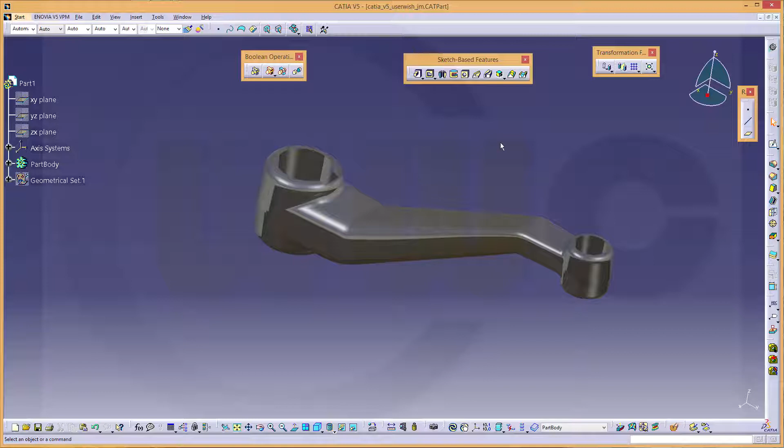I want to do this user wish, and I modeled this after a blueprint he sent me via Facebook. Let's take a look. This picture looked like this, so hopefully I got it right, because I think there is a plane and there is a draft with 4 degrees, I suppose.

Okay, let's take a look at the picture. I think I will do this in 3 bodies. One body will be this, one body will be that one, and one body for this. And I will need some reference elements, so I might need a plane maybe right here with a distance of 205, and I can use an axis system plane right here, and then there should be another plane with a distance of 60 from there to here.

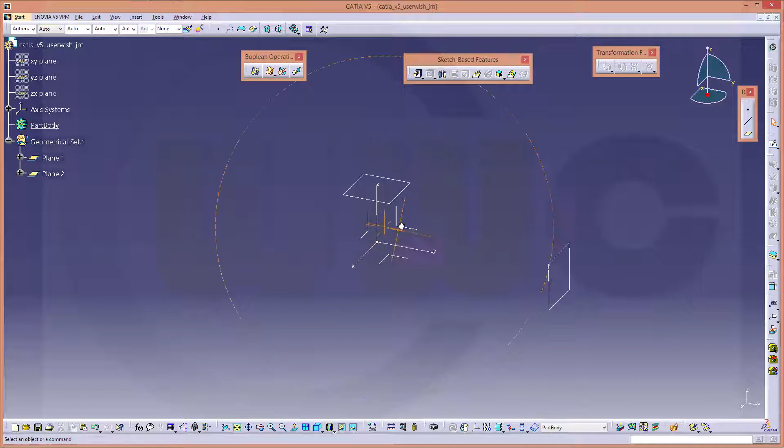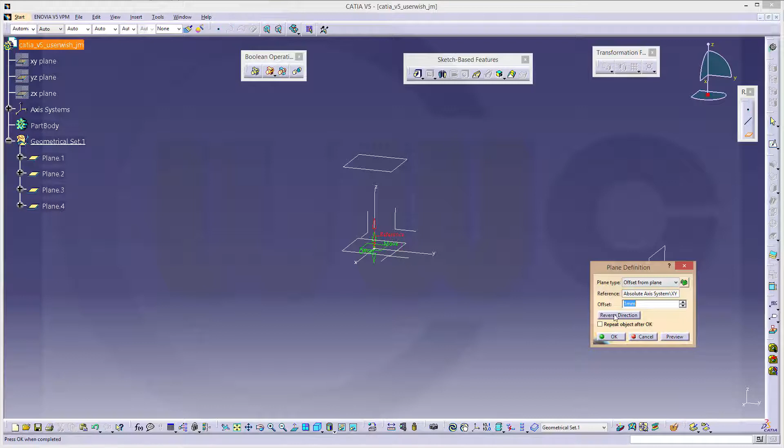And for the drafts I will need some offset planes as well, so let's do these 2. One from that one, distance 1 millimeter, another one in the other direction, and another one up 1 millimeter, yes, and one down 1 millimeter from that one. Reverse direction, and okay.

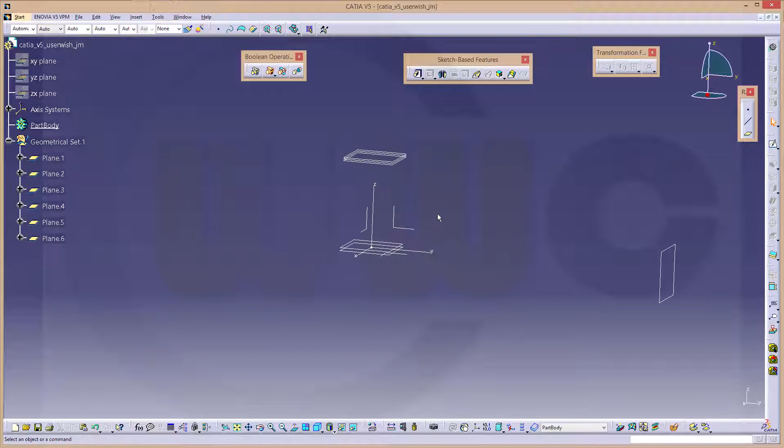Let's check our picture. I need those draft planes for the drafts right here, because this is 2 millimeter. I need one with a distance of 1 millimeter to that plane right here and to that one over there. Okay, so maybe I start with these 2 bodies and add this afterwards. So these are simple extrusions.

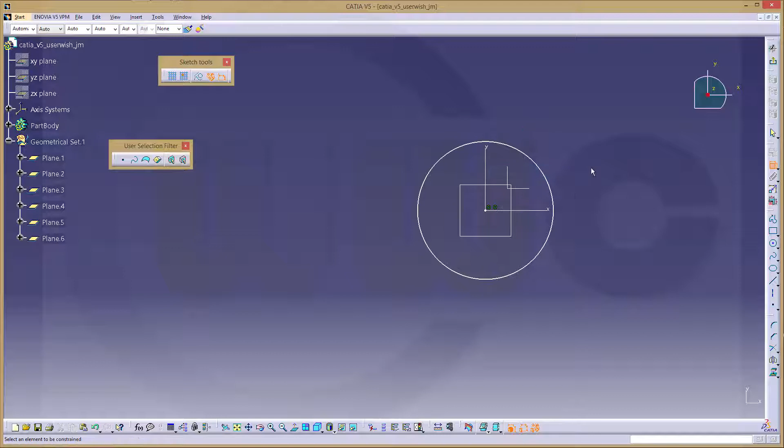So I go for a sketch on that plane. Hide as usual the yellow projected elements, and I need a circle. And this should be coincident on that and on this one. Maybe I should have done it not with planes but with reference points, but it's okay anyway. And the diameter would be 50.

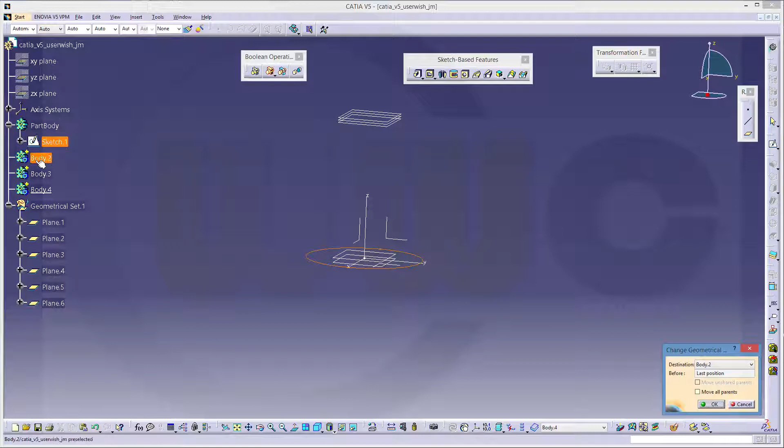Okay, now let's make an extrude, but usually you should leave the part body empty, so we'll insert another body, another one, and another one, because I need 3. Now the sketch is right here, but you could move the sketch over here. Just go to sketch object and change geometrical set and put it into body 2, and okay, make this the body which is in work.

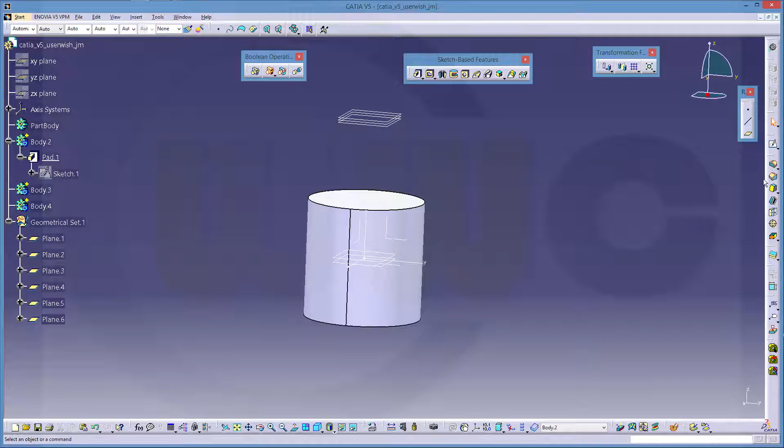Now make an extrude, make it symmetric with mirrored extent, and the distance might be 25. Okay. Now I could already add the drafts. So go for a draft. And 4 degrees, the face to draft is this one. And the neutral element would be the one which is 1 millimeter above, this one. And this would be not only the neutral element, but also the parting element, because I want the draft to stop right here. 4 degrees, the direction is okay, confirm. Or you could do a preview, but this preview isn't always correct, so okay.

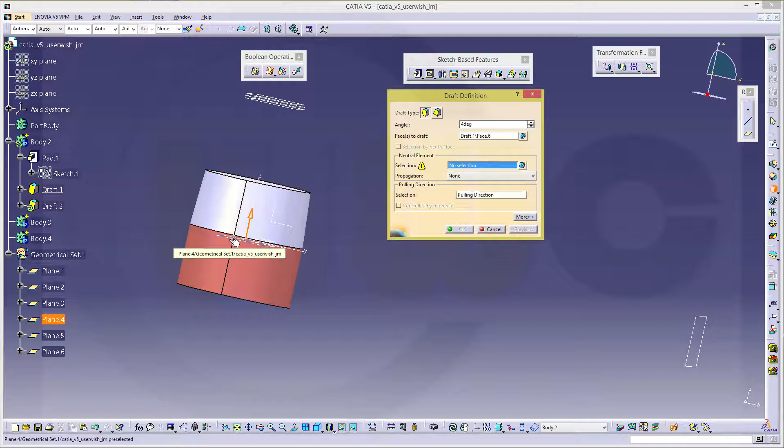And another draft, this face now, and the neutral element would be the one below, direction the other direction, turn it around, and again parting would be the neutral element, and confirm. See, I need almost the same over here, just on a different plane. Define in work object. You could change it right here as well. See, body 4, body 3.

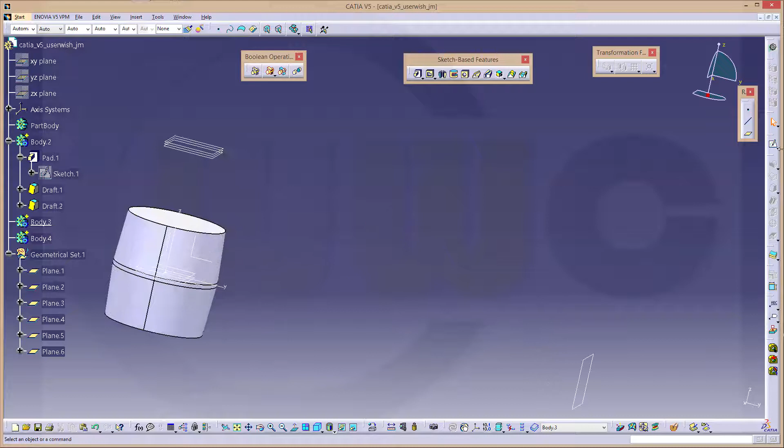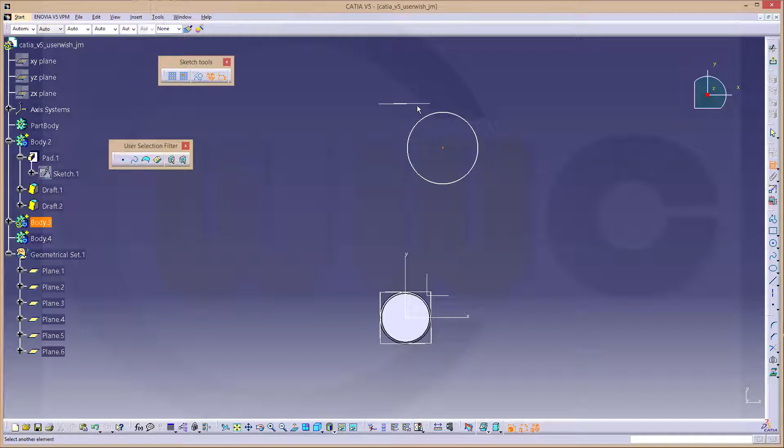And I need a sketch on that plane, on this one. Hide these elements as usual. Okay, and I need a circle, and the center should be on that plane, and it should be on that axis as well. Diameter should be, let me check, 30, and the distance is already there. Okay, leave the sketch, make an extrude, make it mirrored as before, and the distance right now would be 15 to both sides.

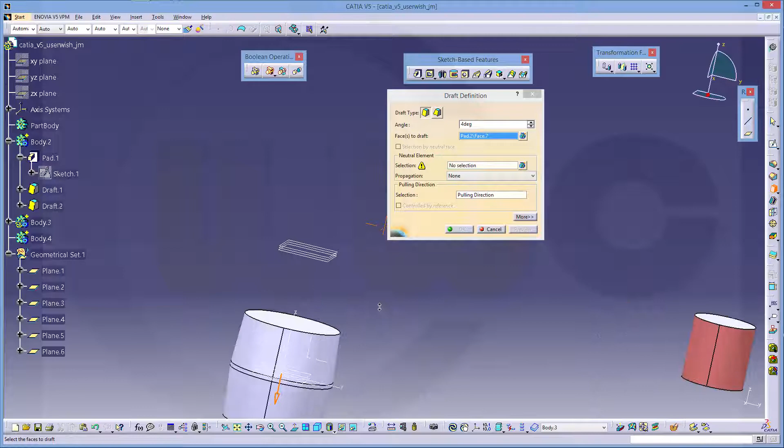Now again the drafts. First draft this side, and the neutral element would be this plane. Direction is okay, parting is neutral. Okay, and another draft, this face, neutral element would be the one down here.

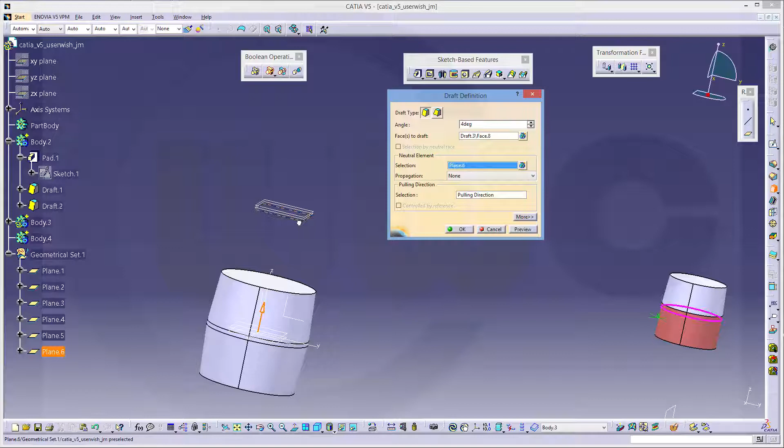Pulling direction the other way around, and again parting is neutral, and confirm. So I got my first two bodies. Now let's go for body 4.

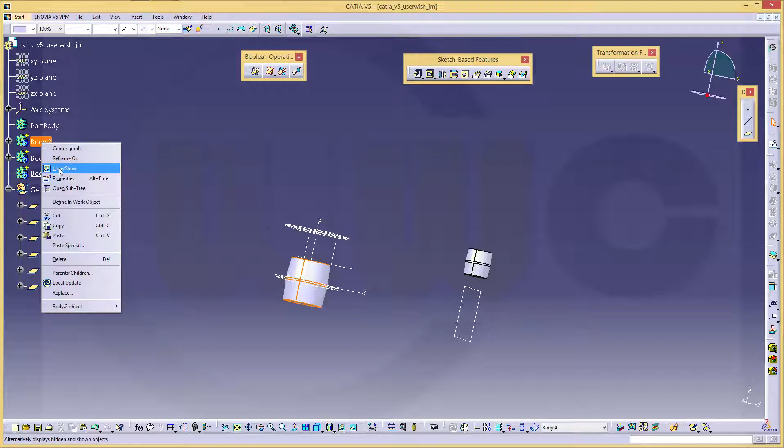Now I could hide these two. Okay, and I could hide at least the 4 planes, I think, these, and that would be this, so yeah. Okay, another sketch right there. Hide the yellow projected elements, and this would be something like, don't snap on anything, like this.

Okay, so that would have a distance to that one, but that's already defined by the plane, so this should be coincident to that one. This should be coincident to this axis, and that point should be right there, and this point should be right there,

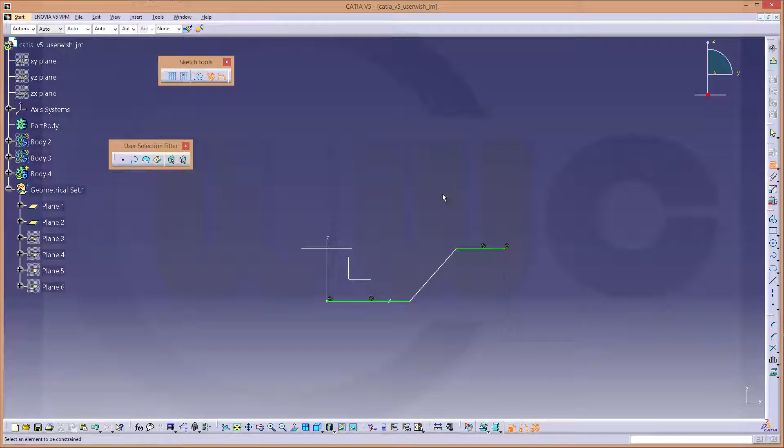and that would be 46.7, and this would be 42.4. Just take a look to our sketch, the image, 42.4, 46.7. Yeah. Okay, back to our Catia.

And I need this one for my offset surfaces, which I need for the drafts on the middle part. Right now in this sketch I don't need these elements, so I will set them, or I could make an output feature, whatever. I will make them for construction only. Okay.

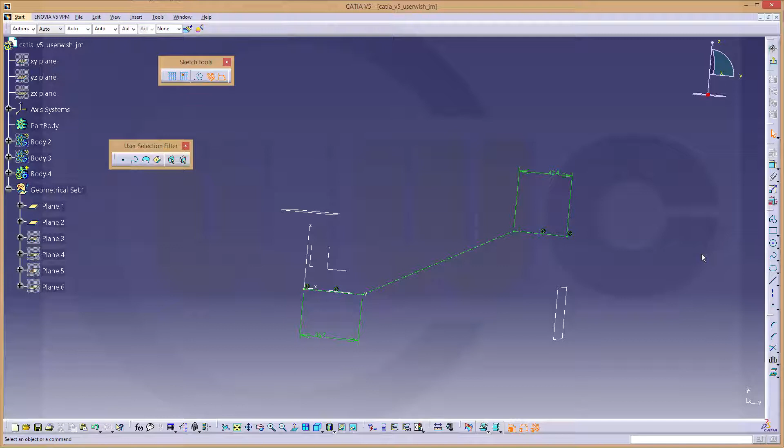Then I could offset these, for example. Oh, yeah, would be an idea. Or I could draw them again, but let's take the offset. Let's look for the offset. I usually don't take it, but it should be somewhere here. Yes. I want to offset this one, and the distance would be in that direction 25. Oh yeah, it's no good because there are different offsets.

So I go for this tool. Let's look normal to the plane, and just press Shift. This should look something like this. Okay. Now those two lines should be symmetric to this one. These two should be symmetric to that one. So move it up a little bit. Here.

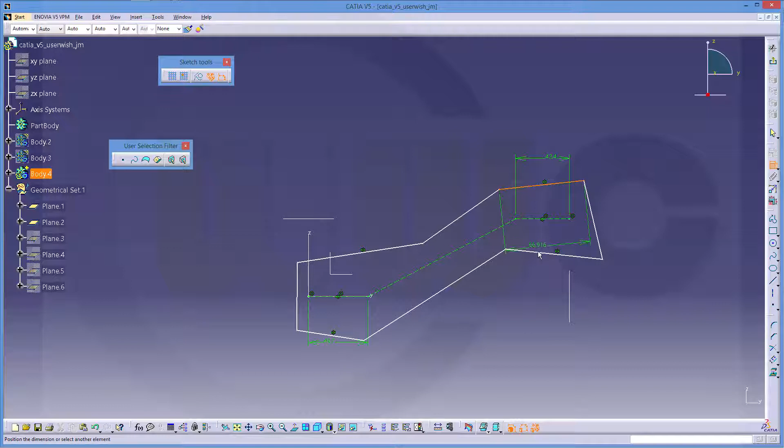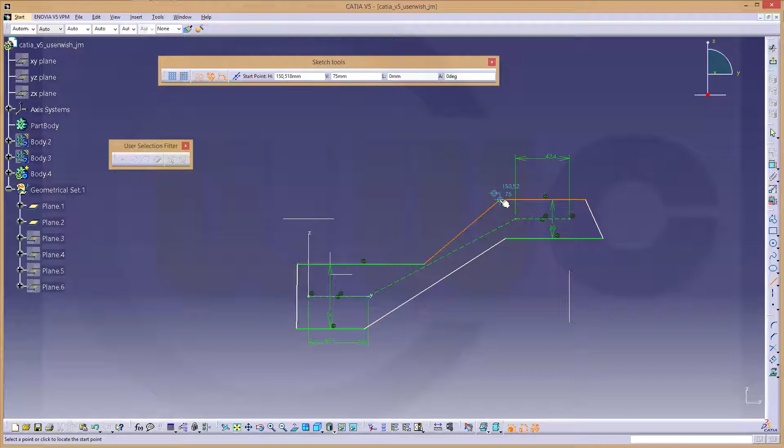That should be a distance, and that distance should be 30. There should be a distance as well, and this should be 50. Then I could use some construction lines, one which goes from that point to this one, and another one which goes from this point to that one. You can do it without, but why not? Move it over here a little bit, add some more constraints.

This should be perpendicular. This should be perpendicular. That line and that point right here should be coincident. That point and that line should be coincident as well. And this line should be in that plane coincident, and that line should rest on that axis coincident. Looks good.

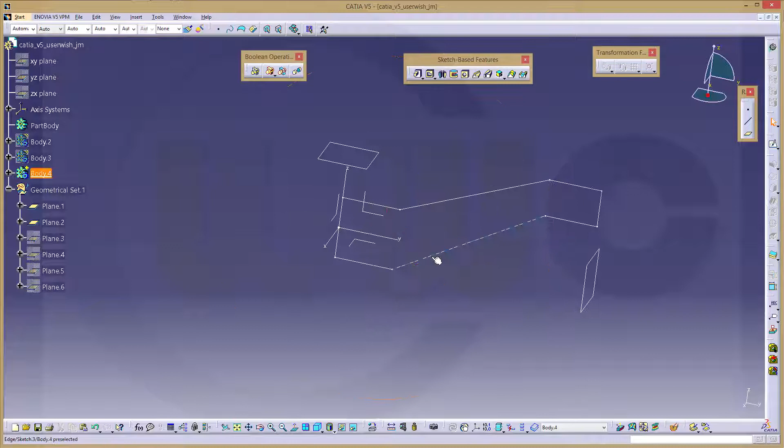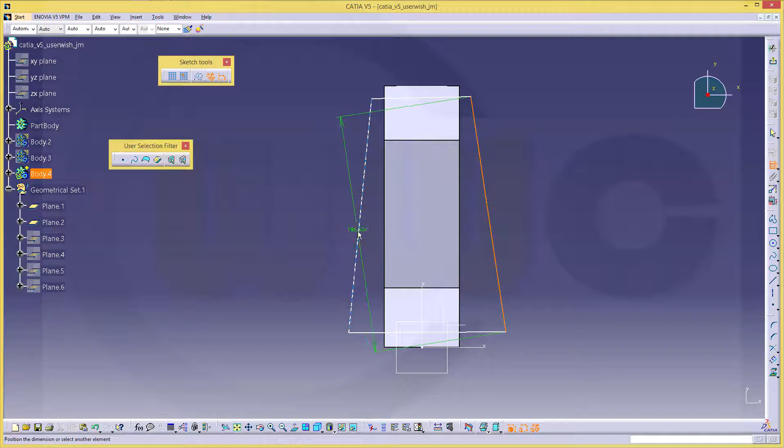So back, that would be a sketch. I use a positioned one on that plane. That's okay. Hide, as usual. And this would look something like a trapeze. Okay. Now these two would be symmetric. So that would be a symmetry line. This line would be coincident in that plane. This line would be coincident to that axis.

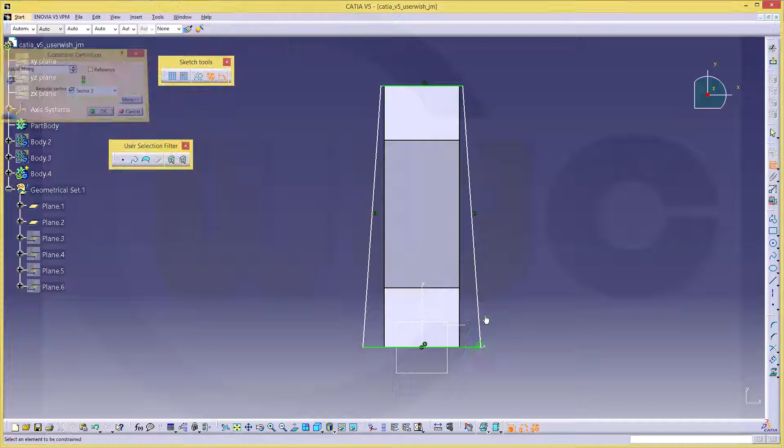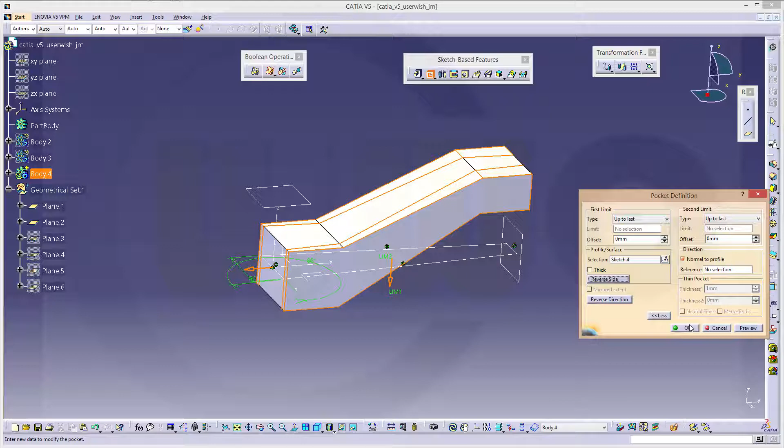No, coincident. And there should be an angle, and that would be 90 minus 4 degrees, so it's 86 degrees. And this should be 50, and that one is already defined by the angle. So leave this sketch. Now let's make a pocket. Make this pocket through all in both directions. So make it up to last, go to more, up to last, and now I would cut this, but I want to cut the outside, so I just reverse the side and okay, and I got my mid body. Yeah.

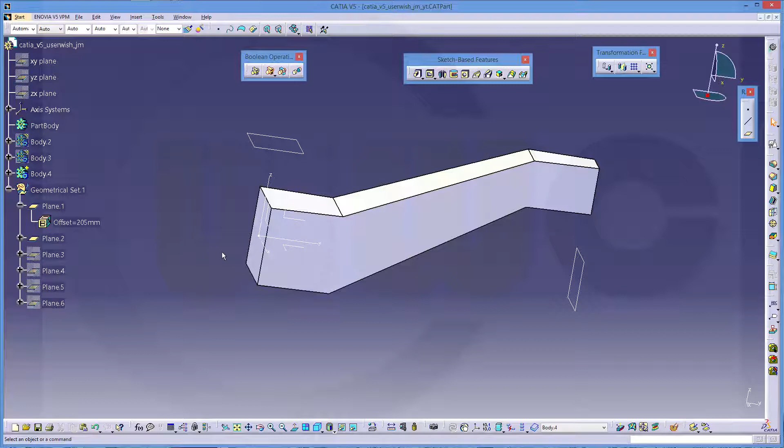Now I need to do the drafts. So you have to decide to do the draft before doing the fillets, right here after the fillets, but I need at least a surface as neutral element. So I will change to my generative shape design, and I will use the sketch, that's the one. I will copy this one, copy and paste it to the same plane. I just paste it and make it visible.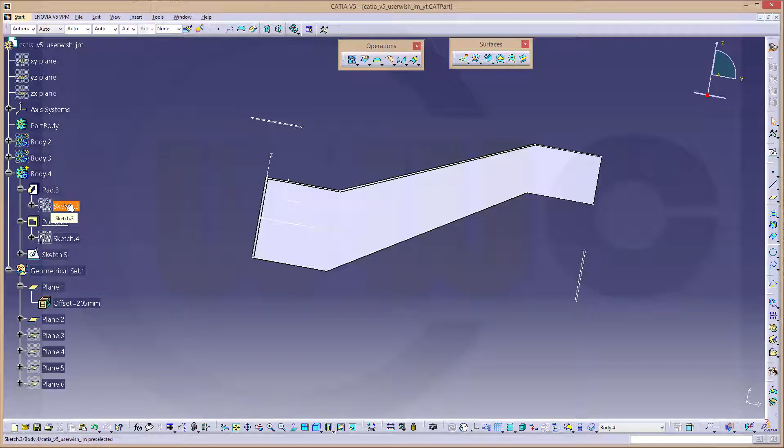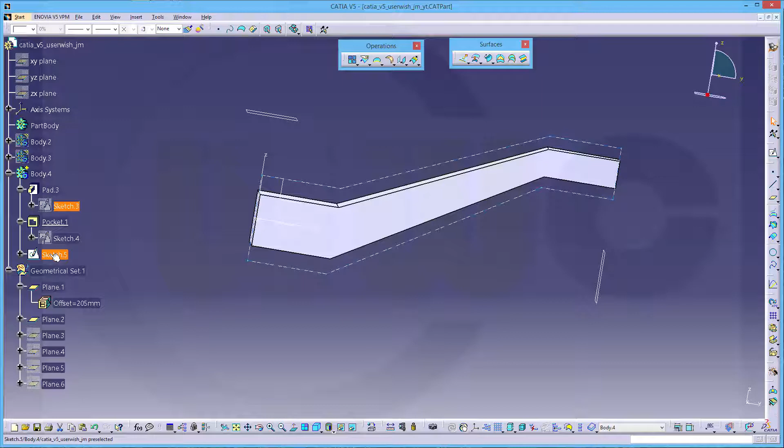Sorry, now it's visible. Okay, and I just noticed it's wrong. That sketch is wrong because that should be not 50 but 30, and that would be not 30 but 16. I was already wondering. So that sketch is wrong as well, so I change this to 30 and this one to 16.

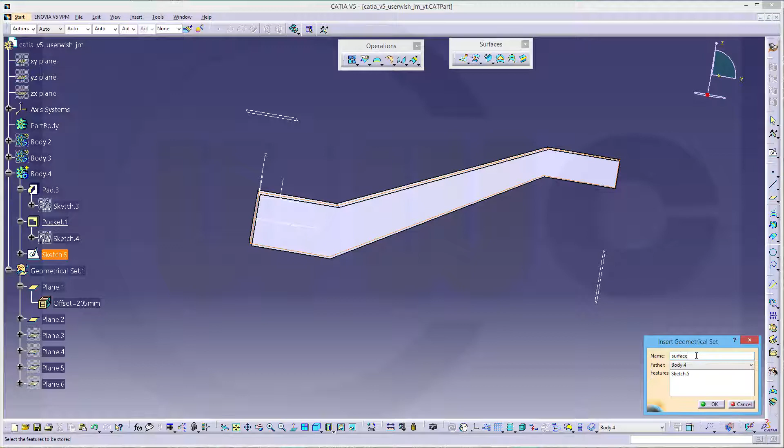And I want to move this to the geometrical set because I need a surface, so maybe I insert another one, geometrical set for the surfaces, and I got this sketch right here, and this surface should be in the part body. Okay. No, not in the part body, but just in my part. Okay, that's more like it.

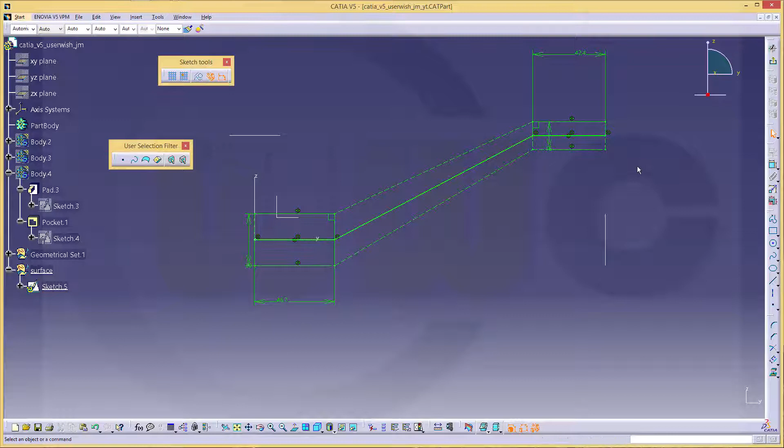And I hide this body, and I will change this sketch because I need these lines, not the other ones. So I will select all of them, make them like this, and then again all for construction, and I need this one, that one, and this one. Okay, now let's extrude this, make it mirrored, make it again 30 both directions.

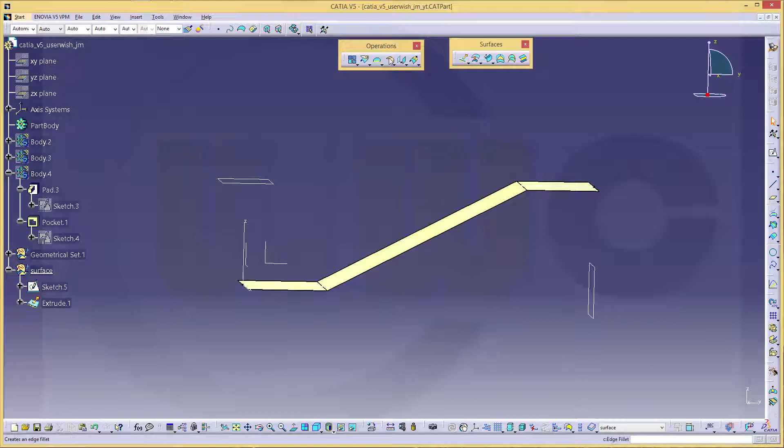Yeah, now do the fillets right here. So we'll need an edge fillet. This should be 25, and that should be 18.

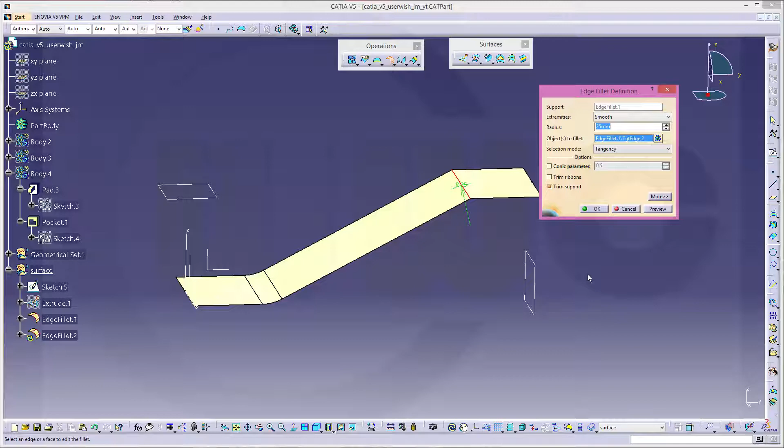Why these fillets? So that would be 10, that would be 40, in between would be 30 difference, and the half is 15, so it's 10 plus 15 or 40 minus 15, and the same here, that's 28, 10 difference is 18, so it's not 18 but 19. So that edge fillet would be 19.

Okay, now I need offset surfaces. So go for offset, there it is. That would be the surface, that edge fillet, and I need 1 millimeter offset in both directions, so both sides. And okay, you should hide this one and that one, so that these are my two offset surfaces. Let's show body 4.

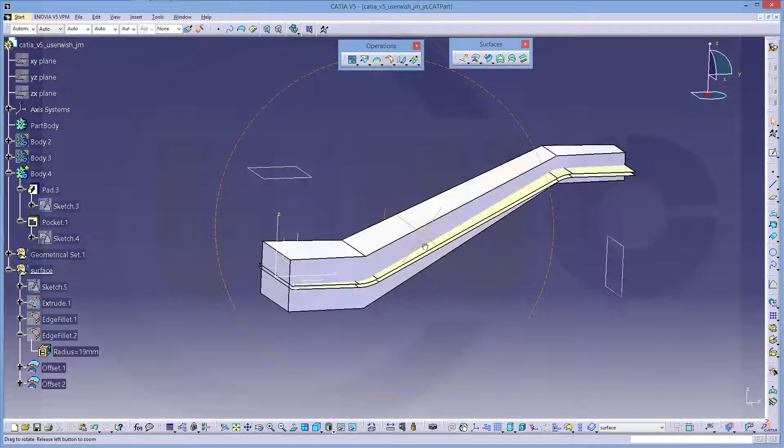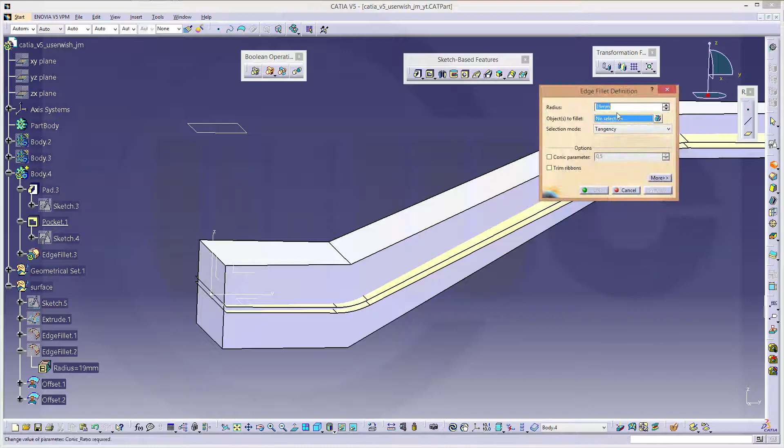And yeah, do the fillets and then make the draft, or the other way around. Maybe I do the fillets first, see how it works. Go to part design, and I need a fillet. Where are my fillets? First go to the body, and then I got my fillets right here. That would be 10 here and over there. Okay, and another one which would be 40 right on that edge. And another one which would be 28 on that edge.

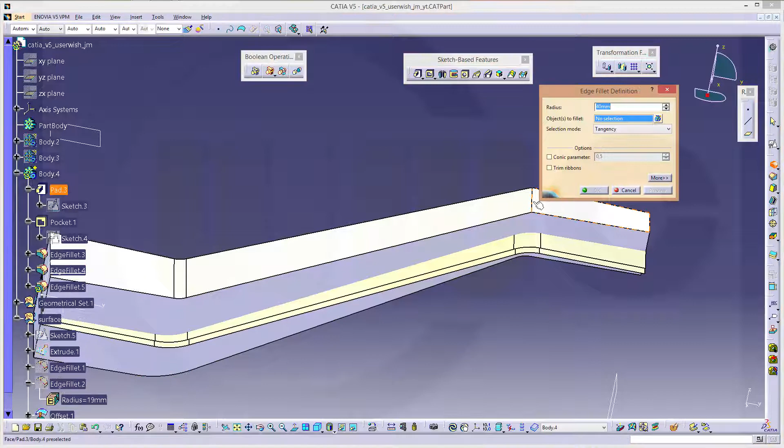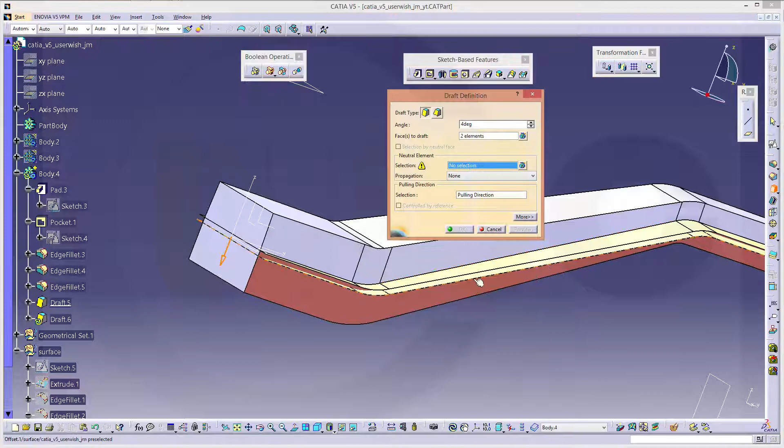Now let's make the drafts. So go for draft. I want to draft this side and that side in the other direction. And parting or neutral element is this surface right here. For more, parting is neutral. Preview, looks good, confirm. Then another one, draft this side and that side, turn the direction around, and the neutral element is this surface. For more, parting is neutral, and okay. Now I could hide my surfaces. Okay.

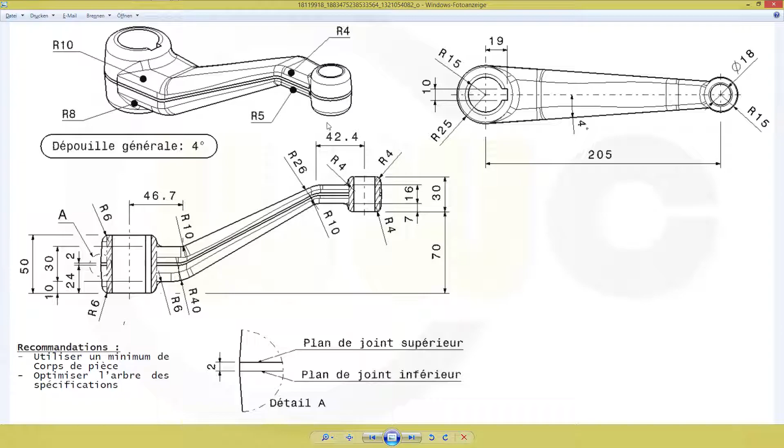Let's take a look at our picture. I got fillet with variable radius, which goes from 10 to 4 and from 8 to 5. So I think from here to here it's 10, from here to here it's 8, and from here to here it's 4, and from here to here it's 5. Okay, so let's go for fillet. Variable radius on that edge, and it goes from 10

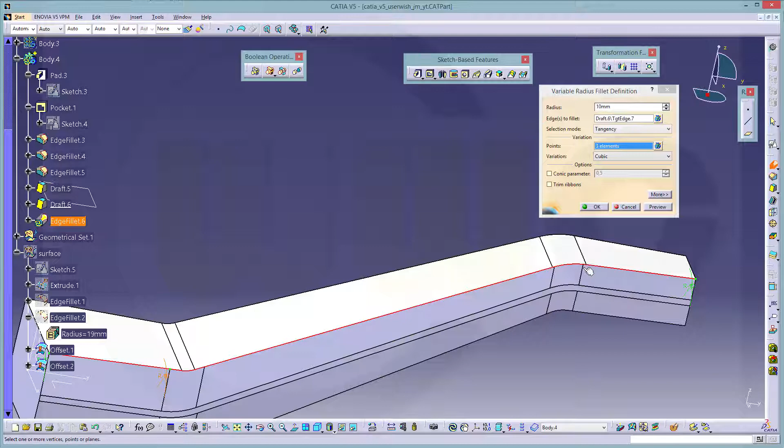and I need more points, so go to the points right here, and I use this one, the end point, and that end point of that edge, or you could use it of that edge, whatever you like. I will go for this one, and this should be 4, and that should be 4 as well. Let's take a look. Looks good. Same on the other side.

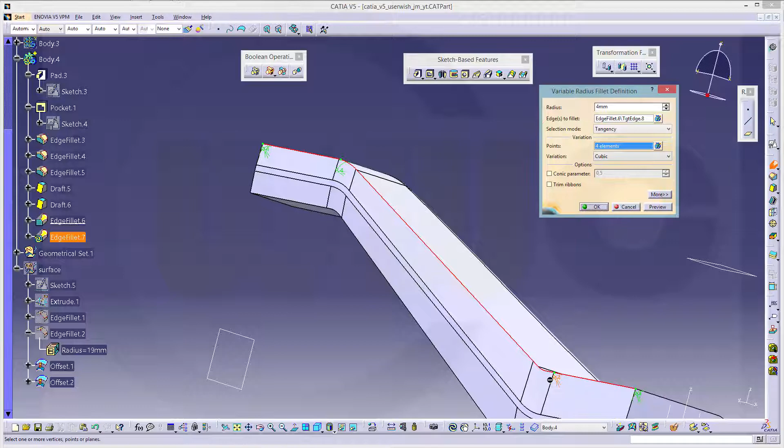Now that's 4. At the moment I need 1 point right here. No, that point and that point right here. This would be 10, and that would be 10 as well. Okay, then these edges should be 8. Yeah, I know.

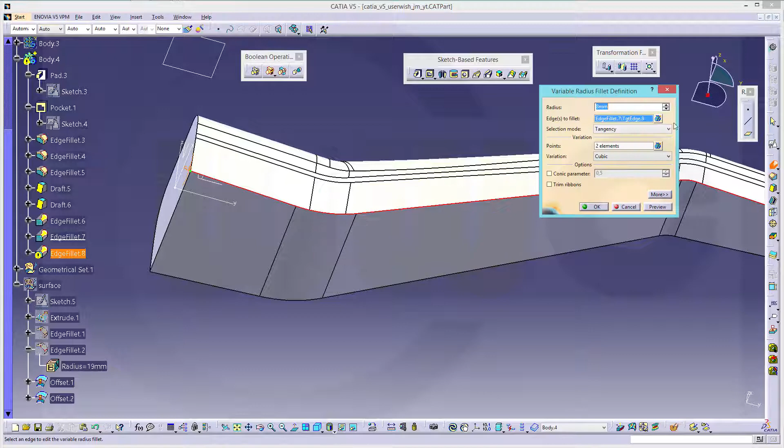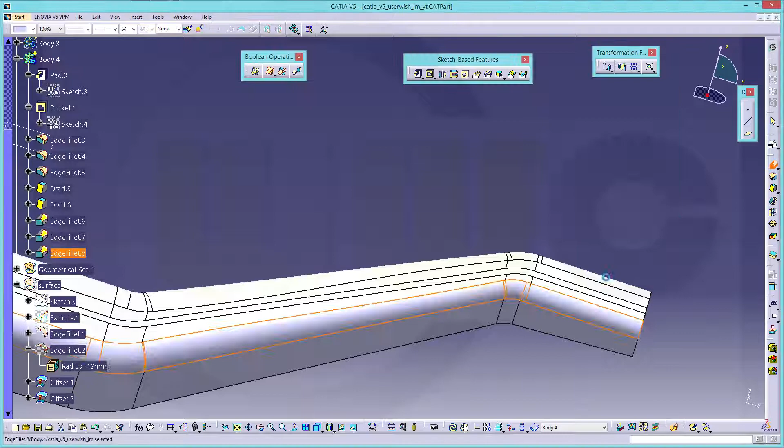And I need 2 more points, maybe that point right here and that point right there, and this should be 5, and that should be 5 as well. Confirm. On the other side, same procedure, another fillet with variable radius, so this should be 8, and I need another point right there.

Yeah, okay, and this is 8, I suppose. Yes, and another point right there, and that should be 5, and confirm. Looks good.

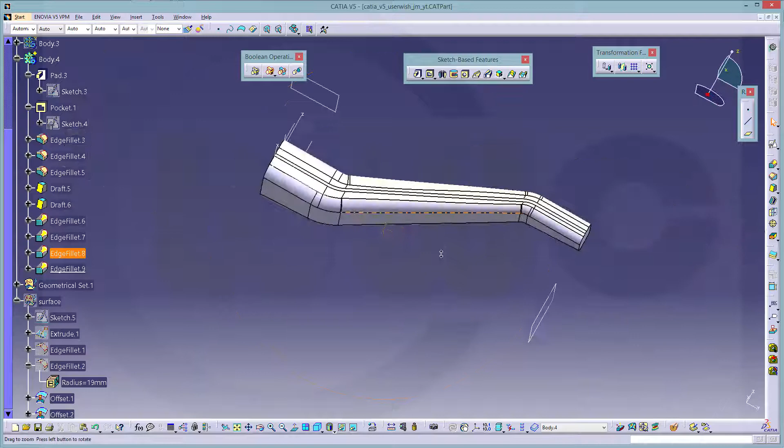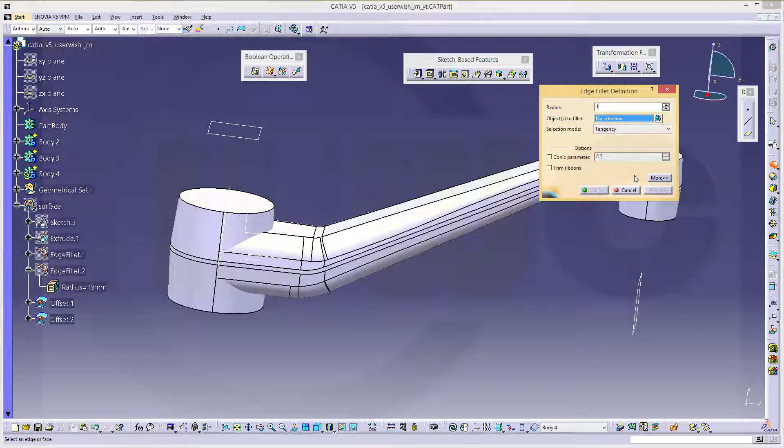Okay, let's show the other bodies. Yeah. Now maybe would be a good idea to make small fillets on these edges. So let's switch to, I'm in body 4. Let's make a normal fillet with 1 millimeter on this edge and that edge, and on the other side as well, this edge and that edge.

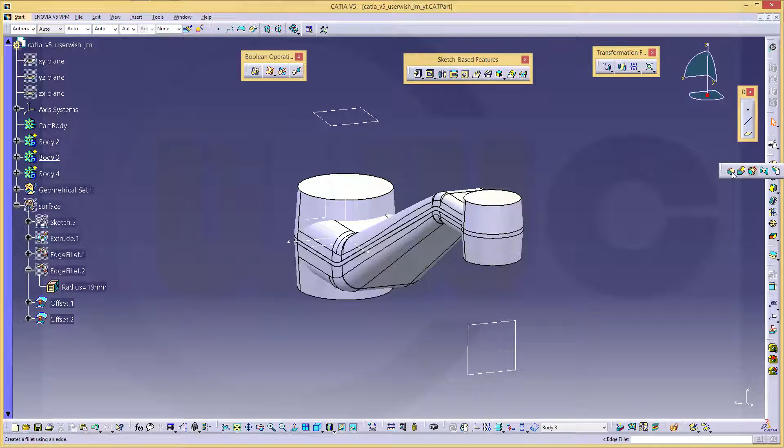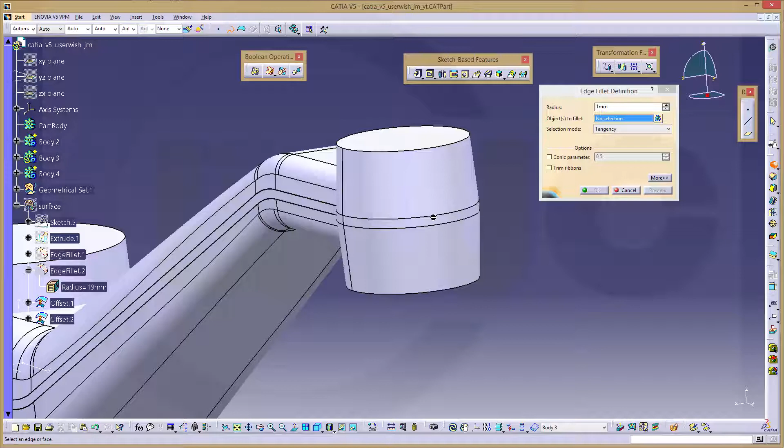Okay, switch to body 3. This should be that one, and again fillet. Seems that's body 4, yes. Sometimes it's very hard to select the edge. It's strange, so let's maybe just show the body which isn't working. Really? Can't select the edge. Amazing. That's really strange, to say the least.

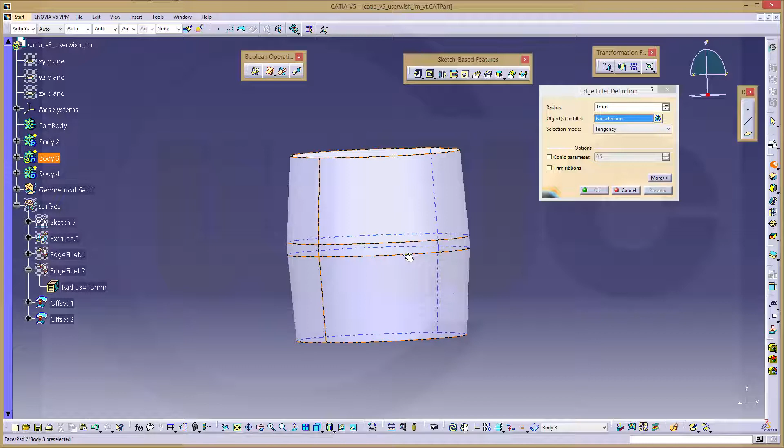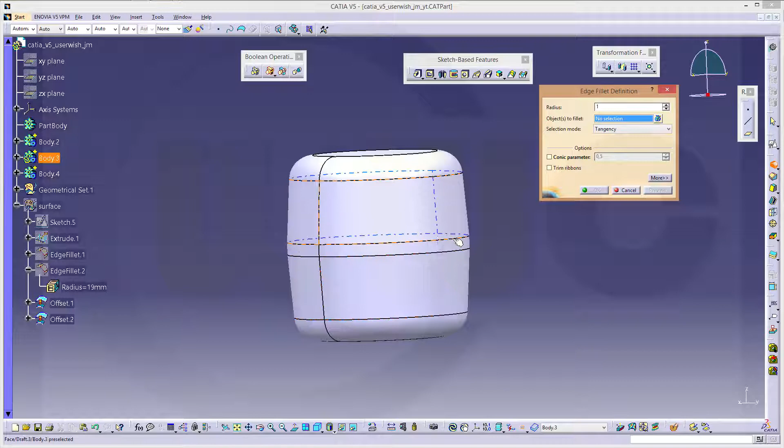Nope, can't select the edge, but I could do the fillets first. This one would be 4mm. Let's check. Maybe I can trick it, make these two with 4. Okay, and now try the ones with 1mm. Still not possible to select these. That's crazy. Can only get the face, not the edge. Okay, so maybe I do it later. Doesn't matter right now.

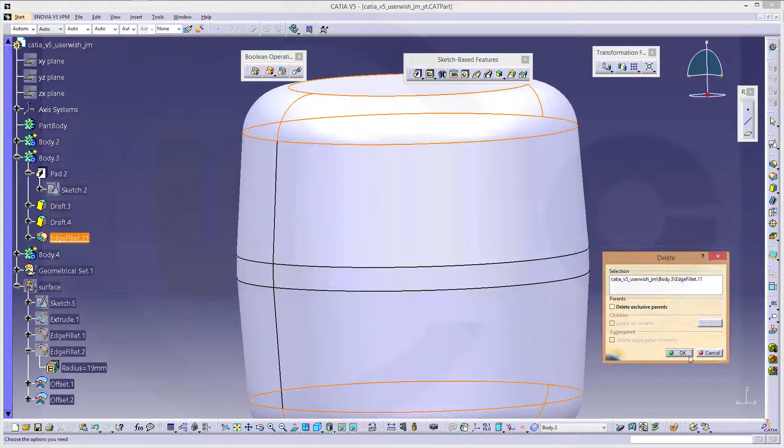So go to that body 3 and just delete this fillet for the moment. Okay. Let's show all bodies. And now you could assemble them. Just select them and assemble them to the part body. Okay. This command doesn't look for the sign, if it's positive body or negative body, so it just assembles them.

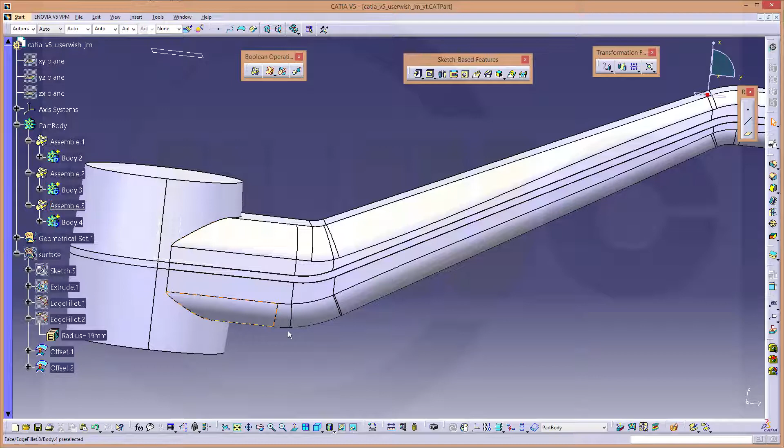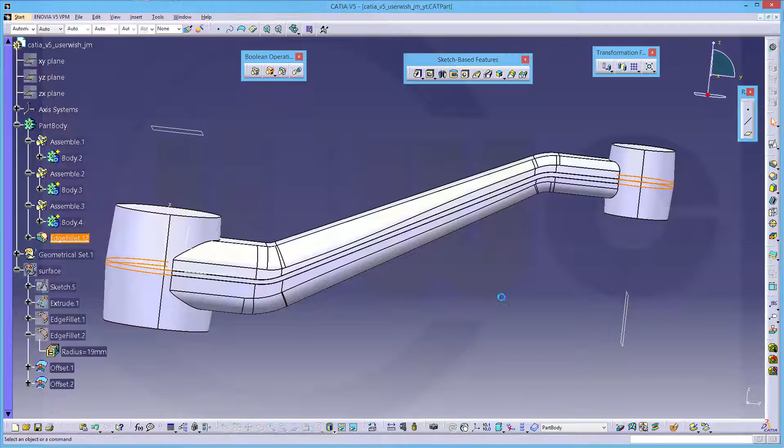Now I want to make a fillet here, here, and there. Maybe now I can do the 1mm fillets. Let's check. 1mm. Now it's possible. That's really crazy. And there, and here, and there. Okay. Now that would be a 6mm fillet over here. So go for 6mm on this edge, that edge, and this edge as well. See if it works. Yes.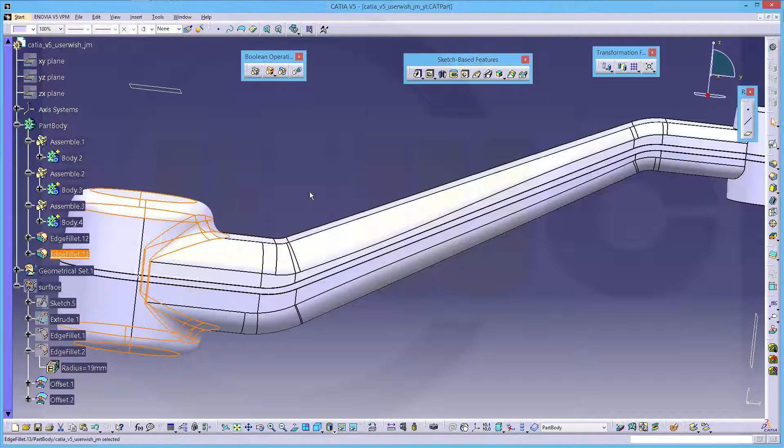And there should be a 4mm fillet. 4 here, there, and on one of these edges. Okay, very, very nice. What's missing? 2 holes, and of course the draft in these holes. You could do the holes with a draft. Might be a good idea. Let's check if that's possible. But I only wanted to go up to these planes.

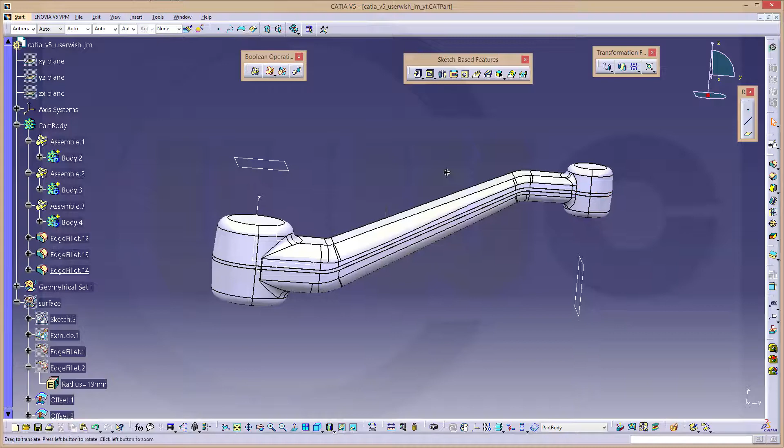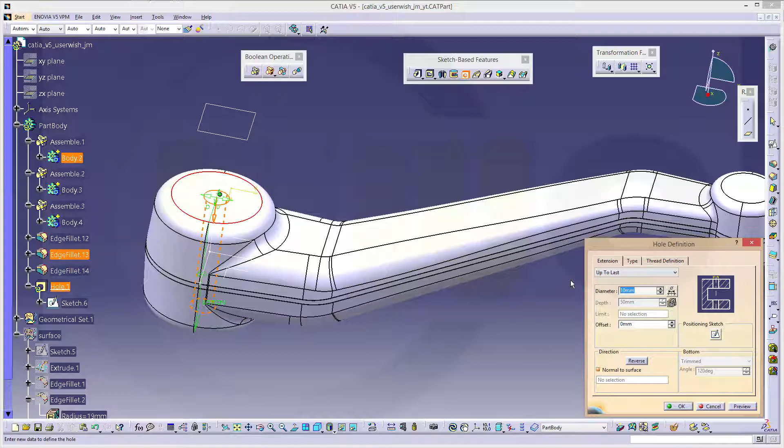And there is also some sort of pocket, so I will do it like this. So select that edge, and go for the hole, select the face, make it through all up to last, and the diameter would be on this one 30. Another hole over there.

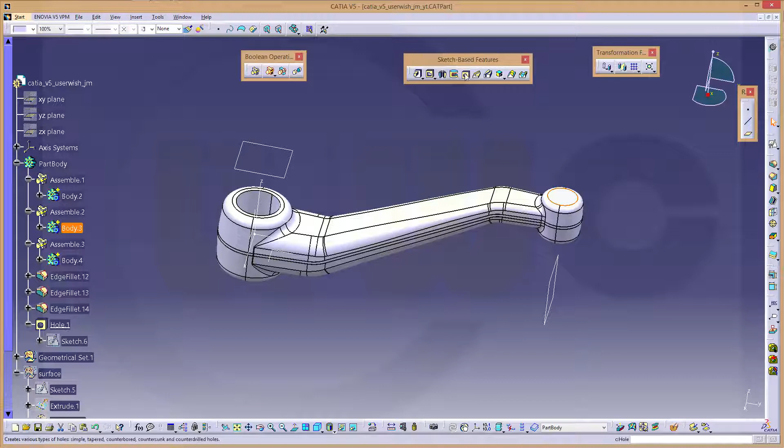Select that edge, select it. Nope. Just the edge, and then the tool, then the... Really? Oh, I want the edge, and then the face. Now it should work. And up to last, and the diameter would be 18.

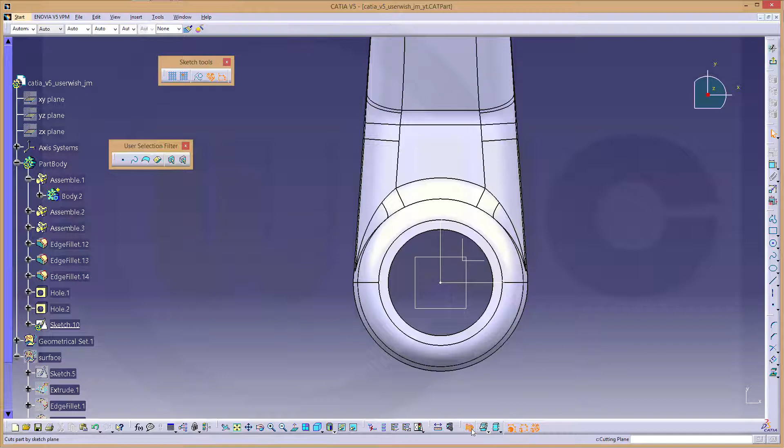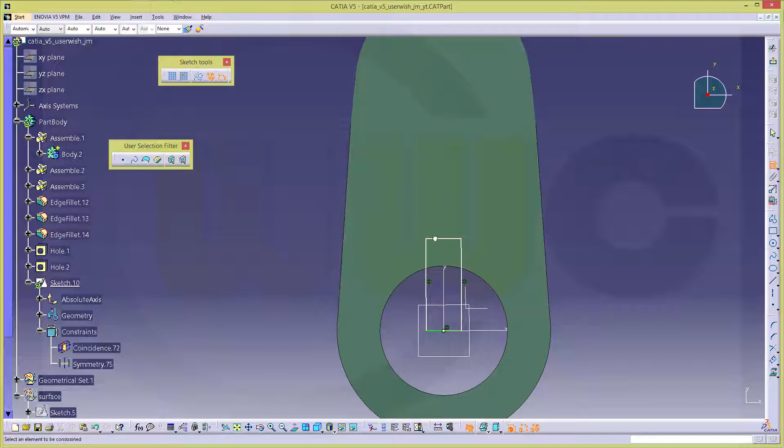So there is a pocket, therefore I need a sketch on that plane right here. Okay. You should hide, sketch, that would be a rectangle, and I don't want these constraints. This one should be right there, coincident. These two lines should be symmetric to that one, and that distance should be, according to the picture, 19.

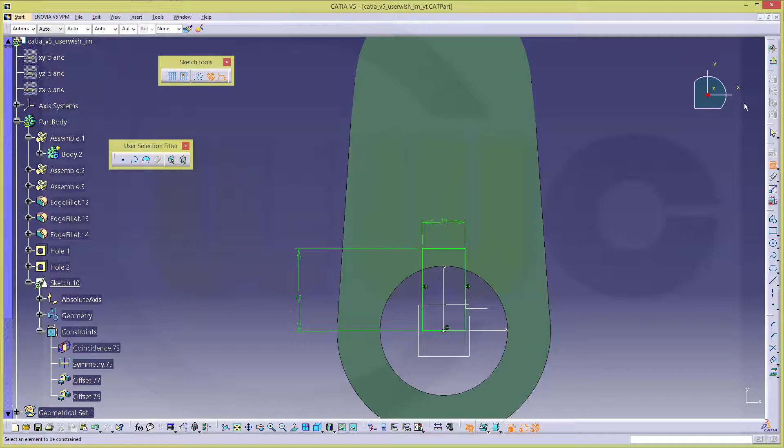And this distance should be 10. Now let's make a pocket. Make it up to last in both directions. And okay. Now I think there should be a draft right here in the middle as well, and over there. So let's take a look at our planes. Just show them. Okay.

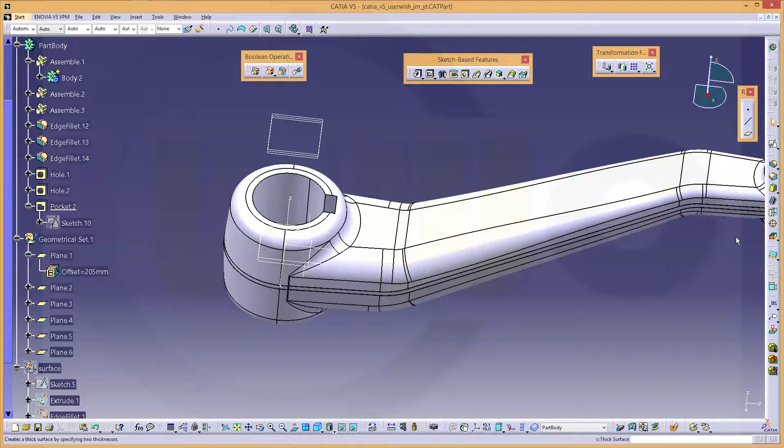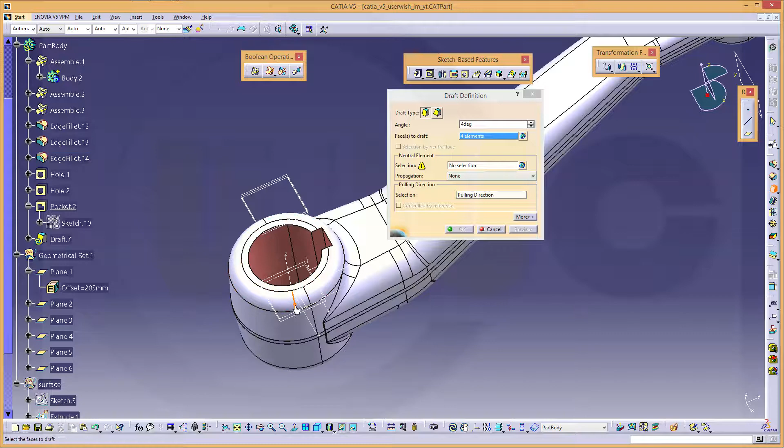Now I need to draft this surface, that one, this one, and that one. Direction the other way around. And the neutral element would be that surface, and that would be the parting surface as well. Okay. Same in the other direction.

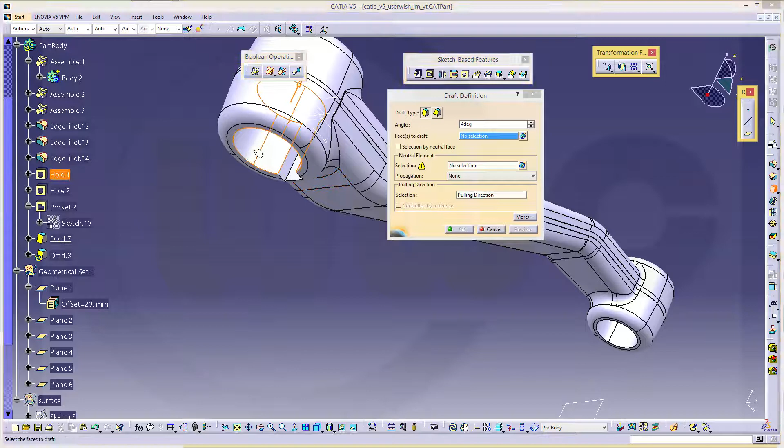Another draft. Now it's this surface, that one, this one, and of course that one. This direction. Neutral element would be that plane, and that would be a parting element as well. Okay. And the same here. Just turn it around.

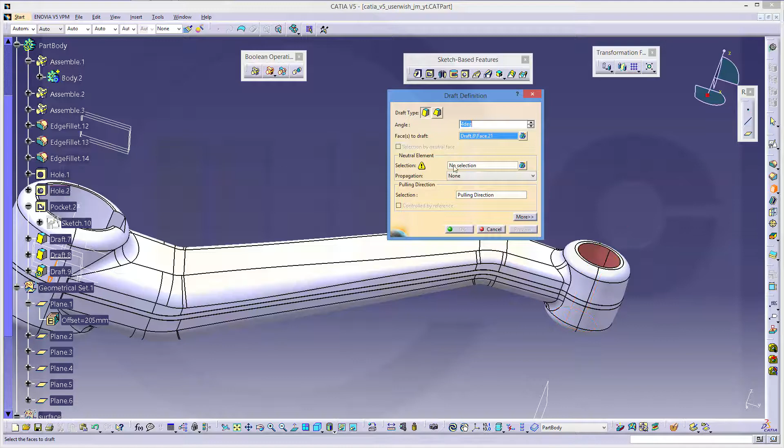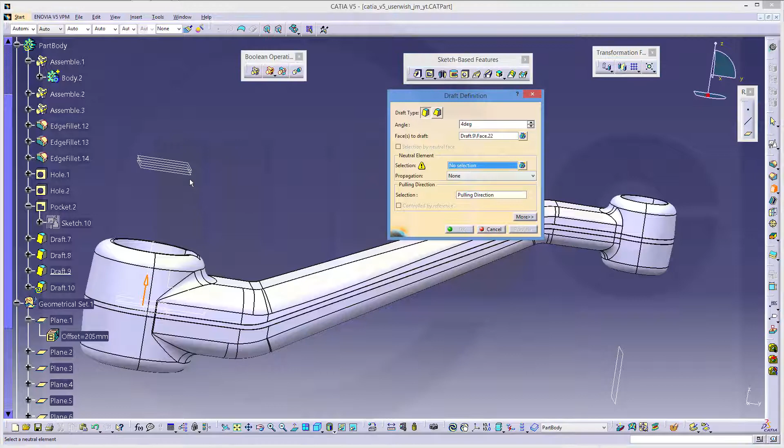Okay. A draft. Where is it? The draft. Yeah, I know. Right here. Neutral element would be that plane. Direction is okay, and again that's the parting element. Okay. And another one. Now it's this face. Neutral element would be that plane. More parting. Okay. And I'm done.